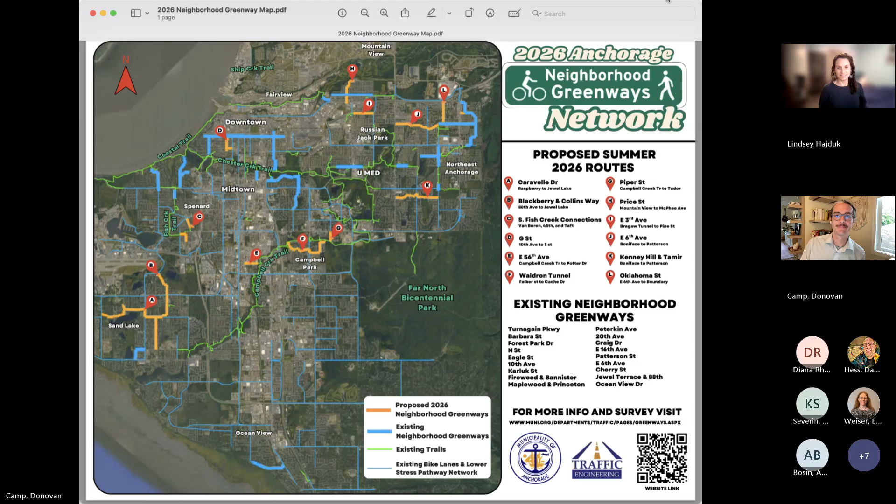Thanks, Lindsey. Okay, I'll try to keep this short. I think a couple of you have seen this - Aaron, maybe 8 times, Lindsey this might be your second or third, and I know you've seen it a couple times. For anyone who doesn't know me, I'm Van Le with R&M Consultants. I'm a planner. I used to work at AMATS, and used to work at the Muni in the Long Range Planning Department, so I come from a land use transportation background.

I am supporting the Department of Transportation and AMATS, who is funding the Minnesota Corridor Plan, Minnesota and I/L Street Corridor Plan. So we're implementing the AMATS MTP, the Long Range 2050 MTP, as well as the AMATS Safety Plan that was completed last year. So let me share my screen.

Let's hope this works. I have 3 computer screens, so let's see if it cooperates. Okay, are you seeing my screen? Yes. Great.

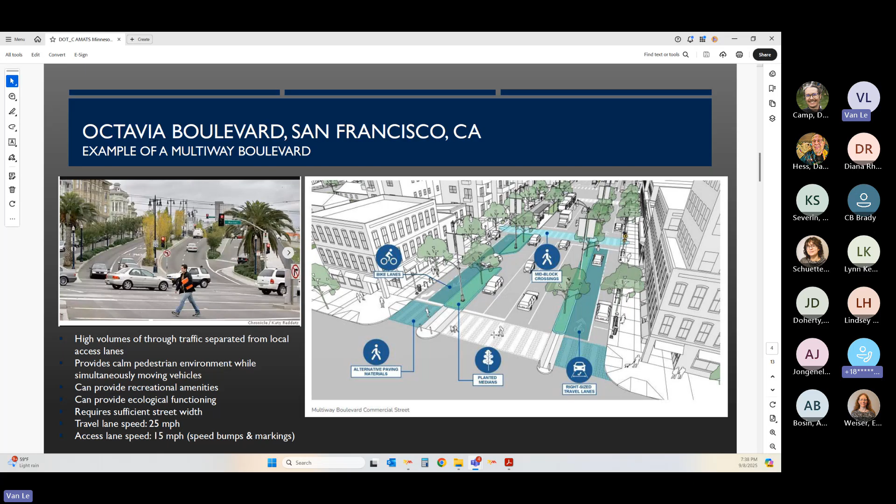So in looking at a multi-way boulevard, it's not one size fits all. There's at least 20 iterations that we've looked at that could possibly happen on Minnesota. I'll show you a couple more visualizations or concepts from other cities that can help explain what a multi-way boulevard is and why it's not one size fits all.

You could have the access lane on both sides, or you could have the access lane on one side. You could have separated bike pathways, on-street parking. Although we are not proposing on-street parking for Minnesota at this point in the Midtown corridor, there is a lot of parking that already exists on sites for the businesses.

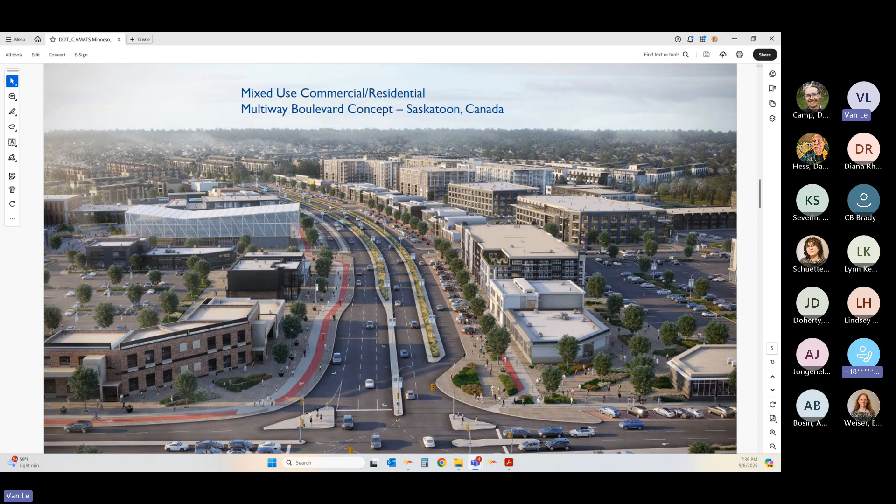This one's in Saskatoon, Canada. This concept and plan has been approved to be constructed. Here's another perspective of that. So you can see there's medians that separate the different lanes.

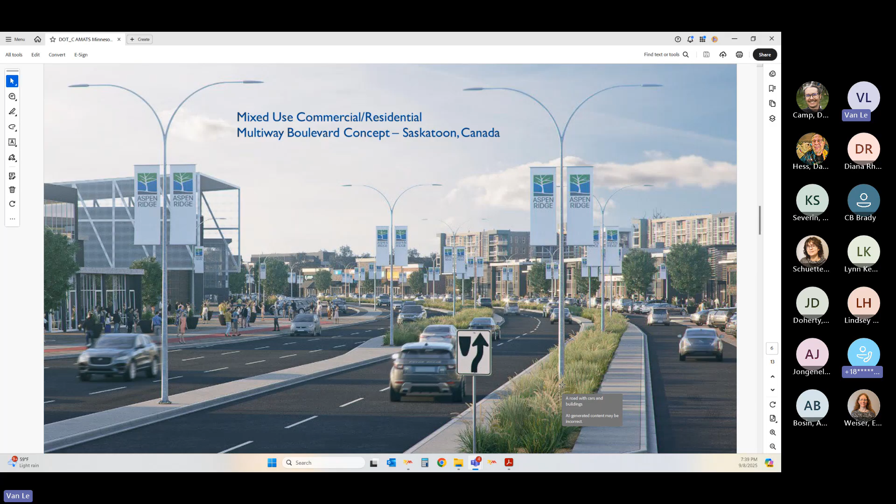We've been doing our rounds, talking to the municipality, talking to DOT chiefs, talking to DOT maintenance and operations on how the different options could work for Minnesota, and how it would be from the perspective of maintenance. How would this help maintenance, snow storage, and drainage facilities during our rainy, slushy seasons?

Just a couple more examples of how speeds are treated in these different communities. The travel lane is 30 miles per hour. Some of the access lanes, almost like a frontage lane, are typically lower speeds at 15 to 20 miles per hour in some of these communities that have multi-way boulevards.

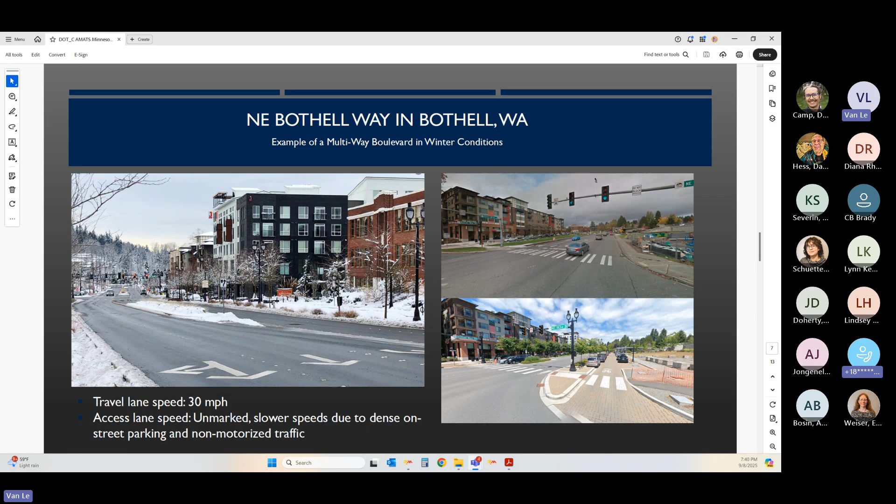This is a before and after treatment of what it looked like before a multi-way boulevard was applied, and then after, showing how the intersections are treated with multi-way boulevards, including improved pedestrian and bicycle treatments at the intersections.

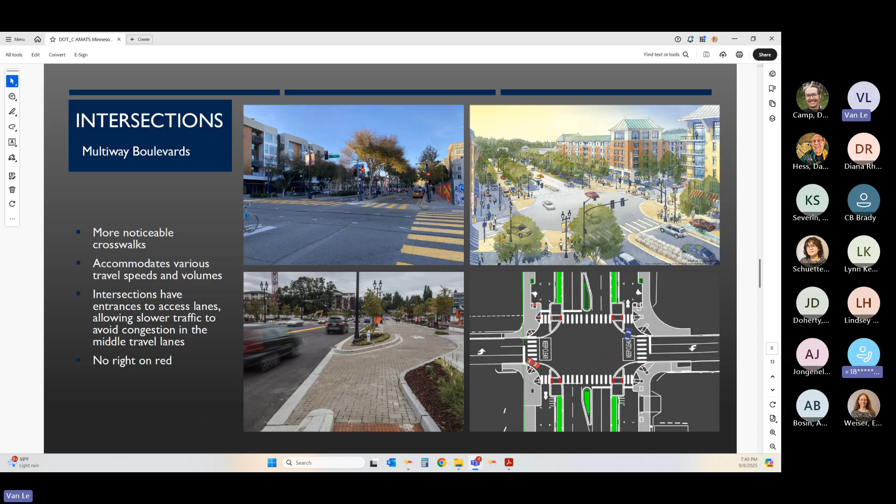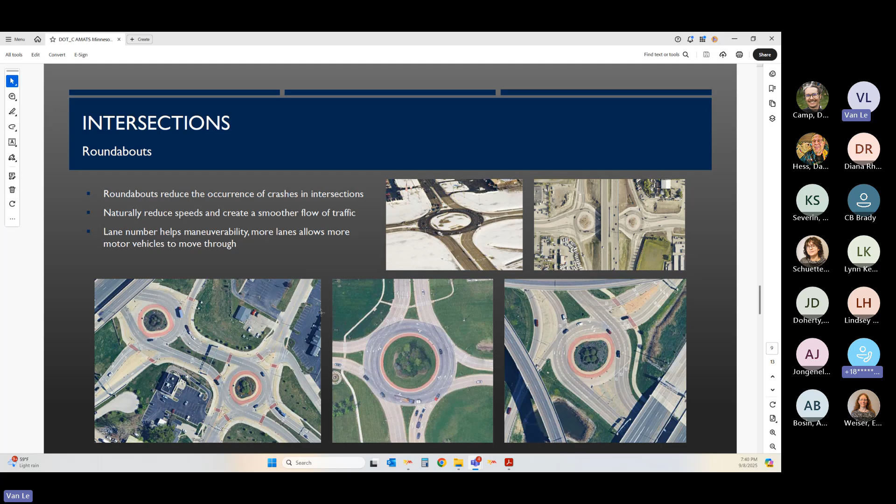We looked at the possibility of a roundabout in a couple sections of Minnesota. We're not saying at this point that this is the right solution. We do have to do a little more in-depth analysis, but we wanted to be transparent and show all the different options we're looking at.

And then a pedestrian scramble—is that possible? Would that be acceptable to Anchorage residents? Where could that possibly go?

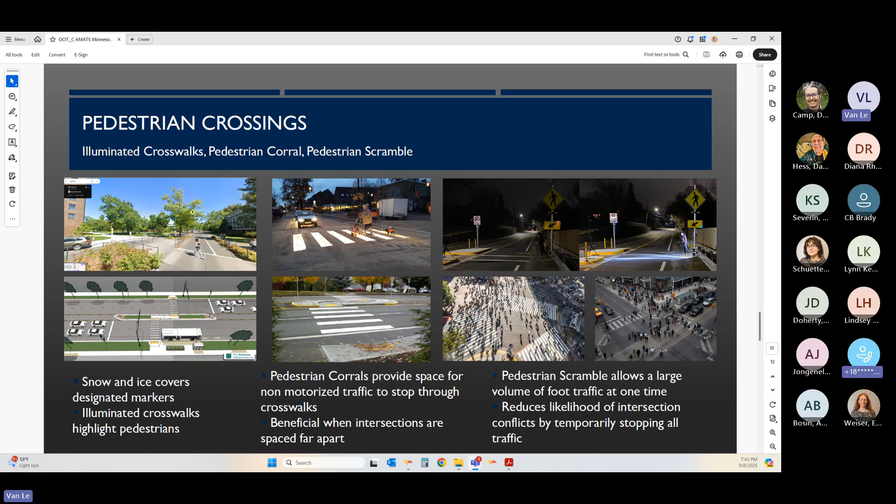We don't have specific locations yet. That is the next step in our analysis, but potentially Northern Lights and Minnesota right by the cars there, the schools, and then the Walgreens corner.

And then we looked at the possibility of this protected intersection for pedestrians as well. We're still trying to resolve how this would work with snow maintenance, plowing, and drainage, of course.

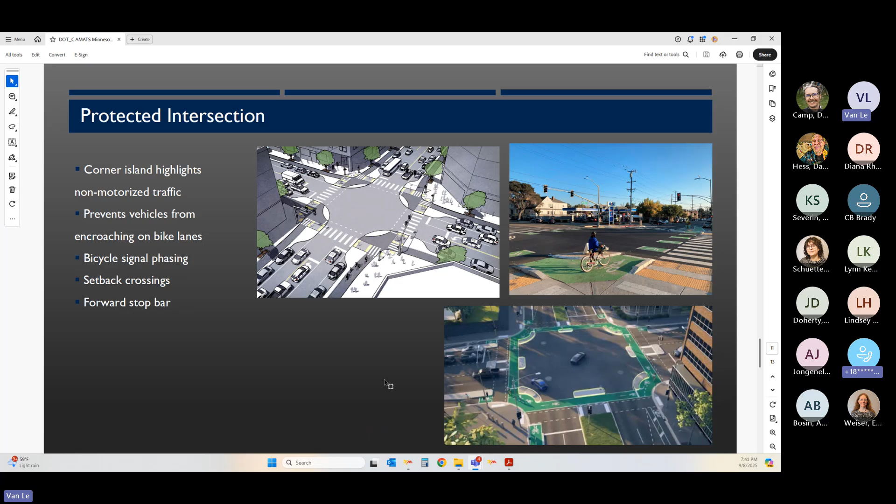And then other countermeasures—I think this was in the letter for the Vision Zero that the committee is looking at—just enforcement, speed reductions, and speed signs that help change driver behavior, hopefully at least educating them, like, you are going too fast, please slow down. A frowny face would be awesome, but I don't know if we could get that. And then, of course, Daryl earlier talked about police enforcement—traffic enforcement is part of the picture as well. That is obviously very cost intensive, labor intensive, so it is a solution, though, that we cannot not look at.